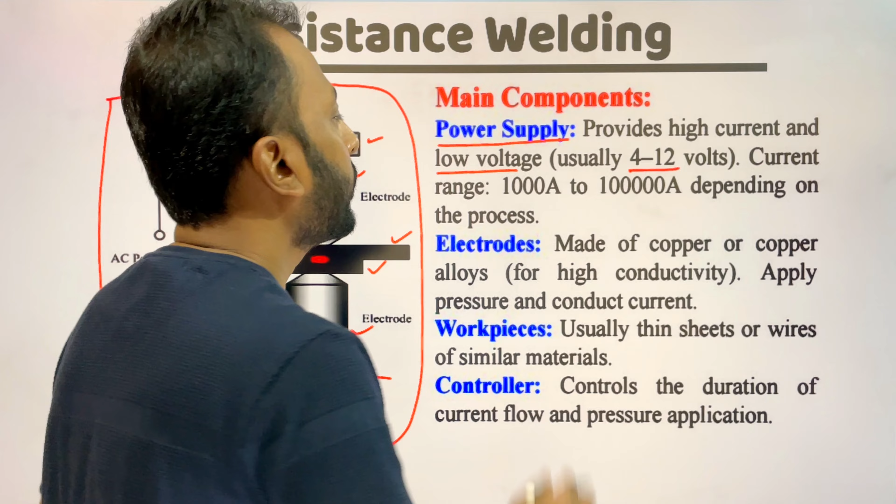So electrode is used here, it is non-consumable. It is used to pass the electricity and to apply pressure both on the parent metals. So here we need power supply. The power supply will be very low in voltage, usually 4 to 12 volts, and a very high range of current, near about 1000 ampere to 1 lakh ampere, depending on the process or depending on the metals we are welding.

So next is electrode. It is made of mainly copper, or copper alloy. Why is it made of copper or copper alloy? Because copper is a superconductor of electricity. So here we are using electricity to create resistance, so we need superconductive materials to flow the electricity. So here we are using copper, the superconductor of electricity. And also the copper electrodes apply pressure both on the parent metals.

Next, the workpieces. Usually it is of thin sheet or wires of similar materials. So here in resistance welding we need to weld similar metals, we can't weld dissimilar metals. Next, the controller controls the duration of current flow and pressure application. It is mainly based on the experience of previous welding. So it is set like a duration, and that duration controls the flow of the current, while pressure is applied manually here.

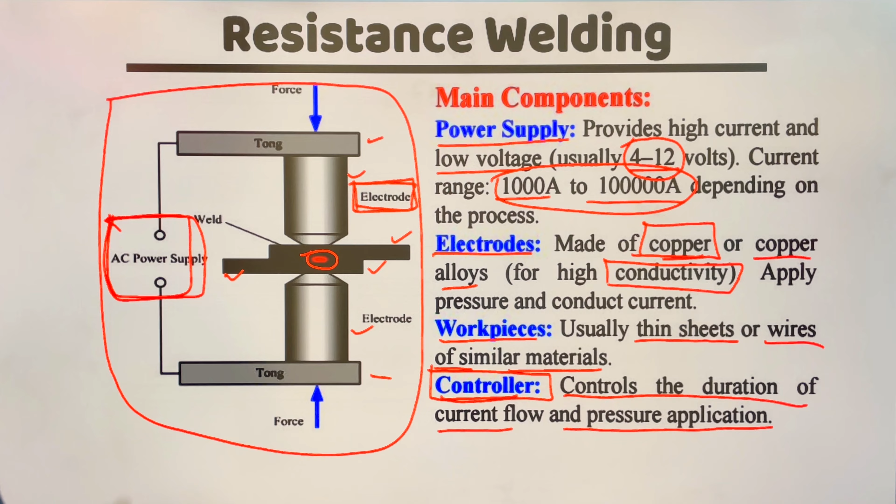So the power supply is connected directly to the electrodes, and we place the materials which will be joined together, similar materials, between the electrodes and provide support to them, and we apply pressure. Here one electrode is fixed, it cannot move up and down, and the other electrode is movable, it can move up and down.

When we need to increase the gap between these two electrodes, we move the upper electrode upwards and place the parent metals. After placing, we apply pressure on the upper electrode to apply pressure on the workpiece, and after the application of pressure we

give AC power supply to the electrodes, and after a short duration the contact area fuses and mixes with each other. After solidification we release the pressure and get the welding joint. Here we can see this is a very small portion that is getting welded - the red portion is getting welded. So in this figure we can see the red portion of the resistance welding.

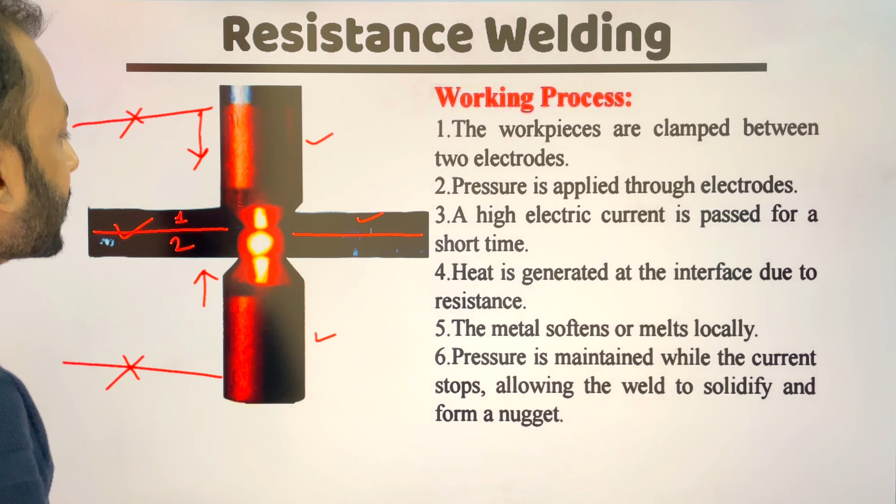When we are applying pressure, we power on the AC power supply, and after a few time we disconnect the AC power supply, but the pressure remains constant. After a few time, when this portion gets solidified, we release the pressure and get the weldment or welding joint.

So why does this happen? This happens because of the electricity. The current is flowing through the electrodes and through the transformer. So this is the complete circuit.

When the electricity is coming through this portion, the density of the electricity or the ampere is much more between these areas - between these areas the ampere is very high. So by the ampere, this portion gets high resistance, and because of the high resistance, heat is generated.

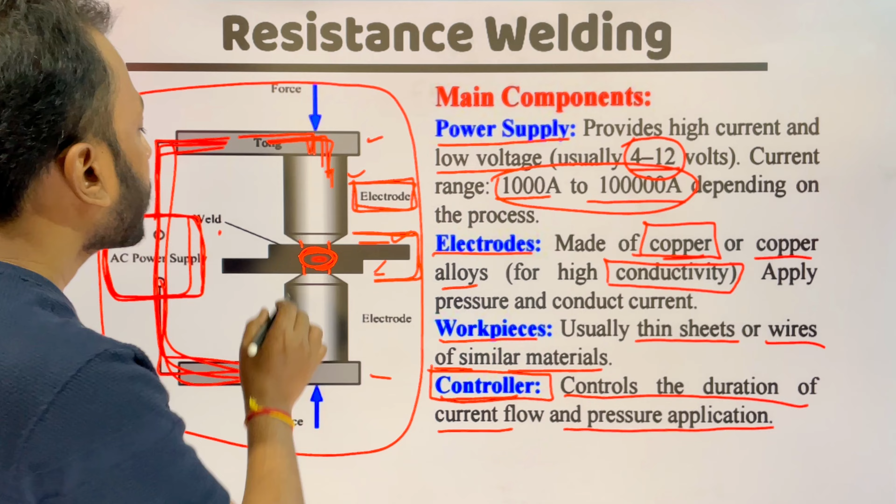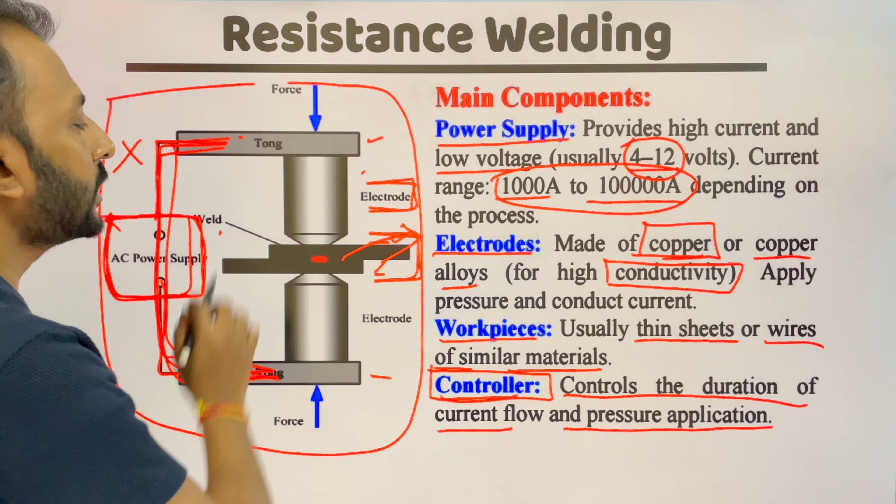By the heat, the metal where we apply more pressure fuses and mixes together. After the AC power supply is disconnected and pressure is kept constant, the portion solidifies, and after the solidification we release the pressure and take out these workpieces to get a welding joint or weldment.

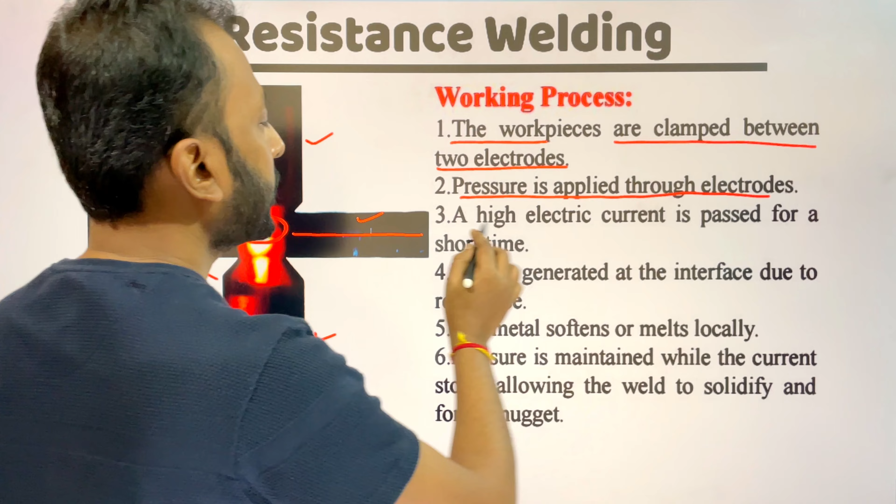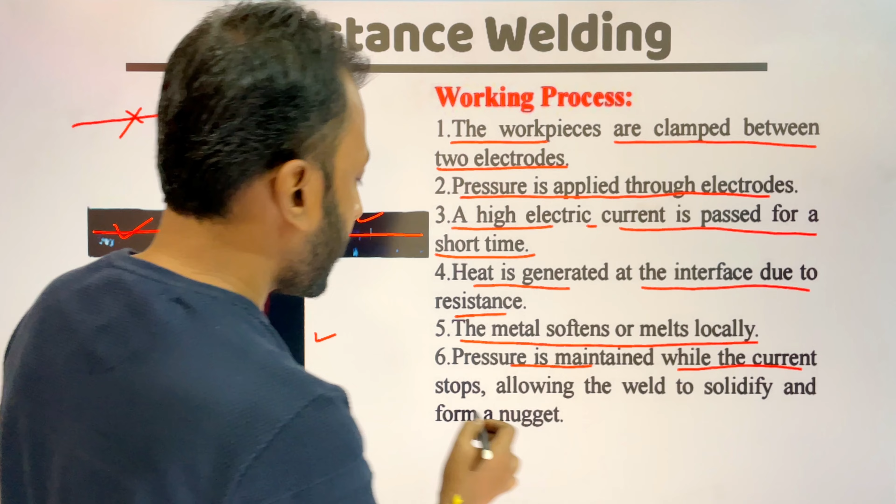So here the workpieces are clamped between the two electrodes. Pressure is applied through the electrodes. A high electric current is passed for a short time. Heat is generated at the interface due to resistance. The metal softens or melts locally. Pressure is maintained while the current stops, allowing the weld to solidify and form a nugget or joint. So this is the working process.

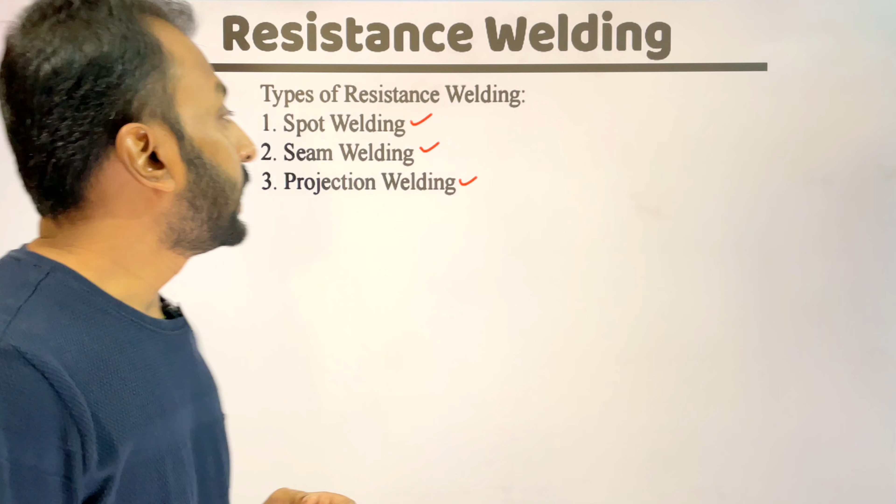So there are few types of resistance welding. The main three types are spot welding, seam welding and projection welding. In the next videos I will discuss these three methods. Resistance welding is not only of these types - there are many types, but the main types are only these three.

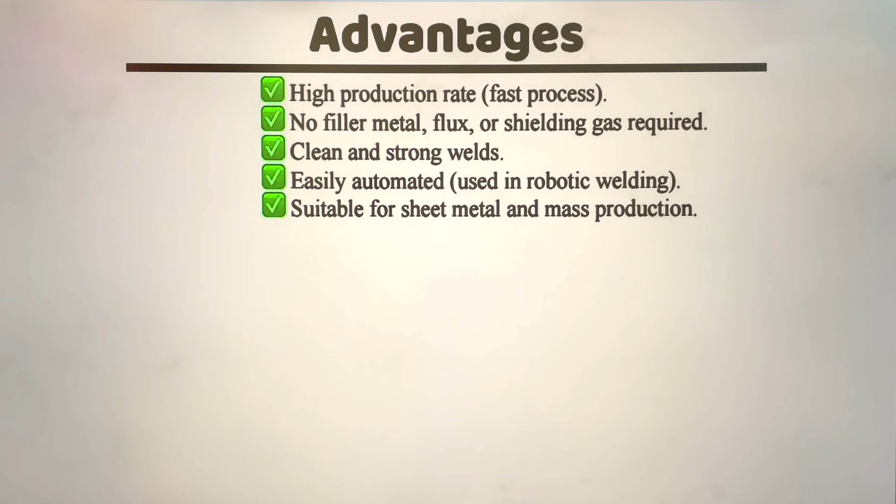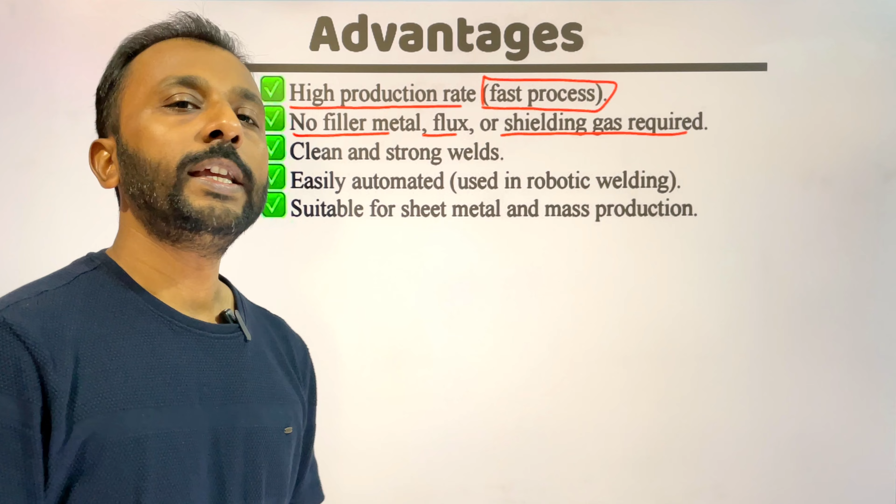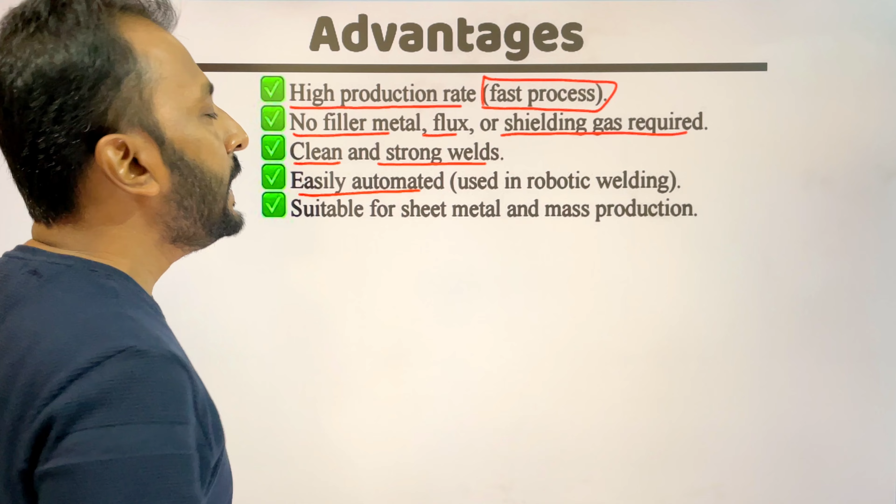So what are the advantages of resistance welding? It has high production rate - the process is very fast. No filler metal, no flux or shielding gas required, so we don't need to clean the welding joint after welding. It gives clean and strong welds, can be easily automated by robotic welding, and is suitable for sheet metal and mass production.

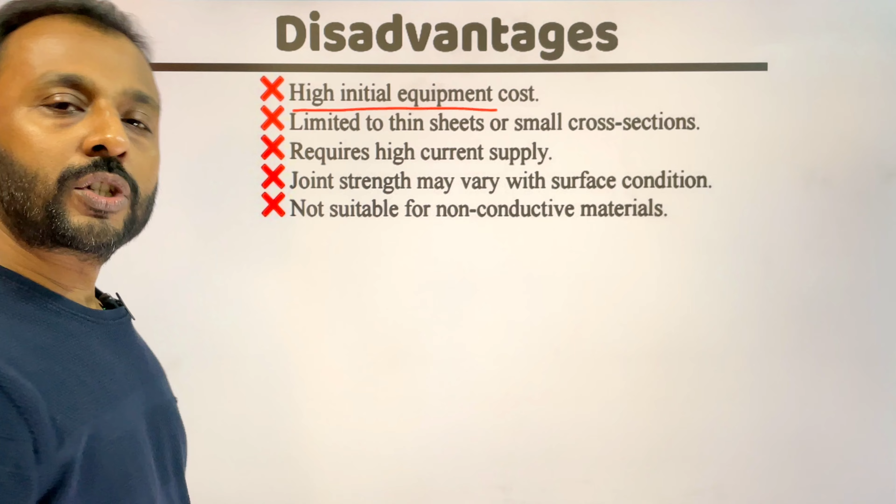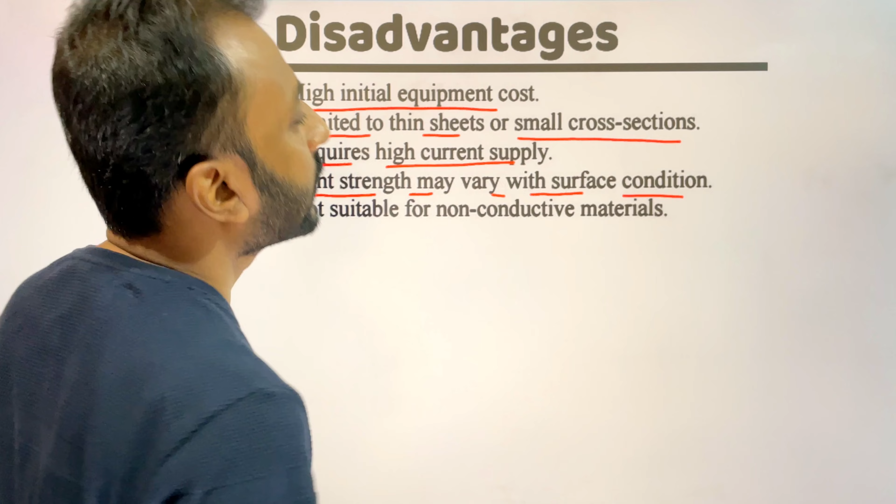Though it has some limitations or disadvantages: high initial equipment cost, limited to thin sheets or small cross sections, requires high current supply, joint strength may vary with surface condition, and also not suitable for non-conductive materials. If we want to join non-conductive materials, it is impossible.

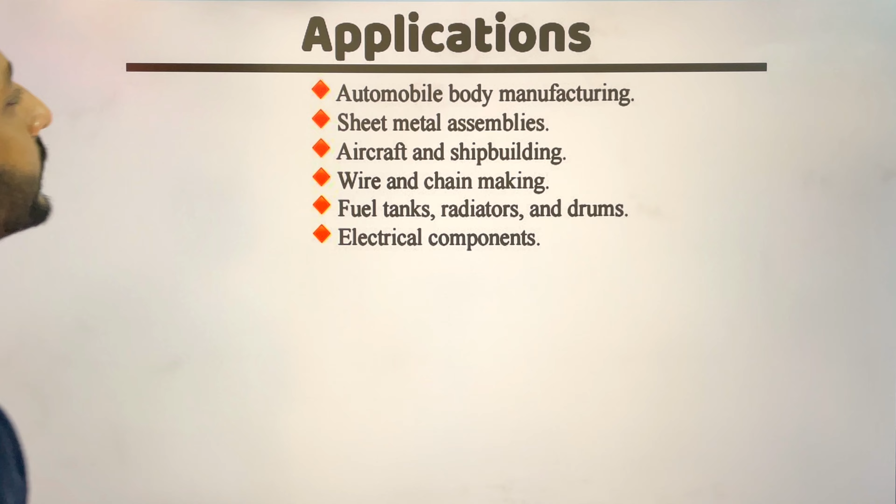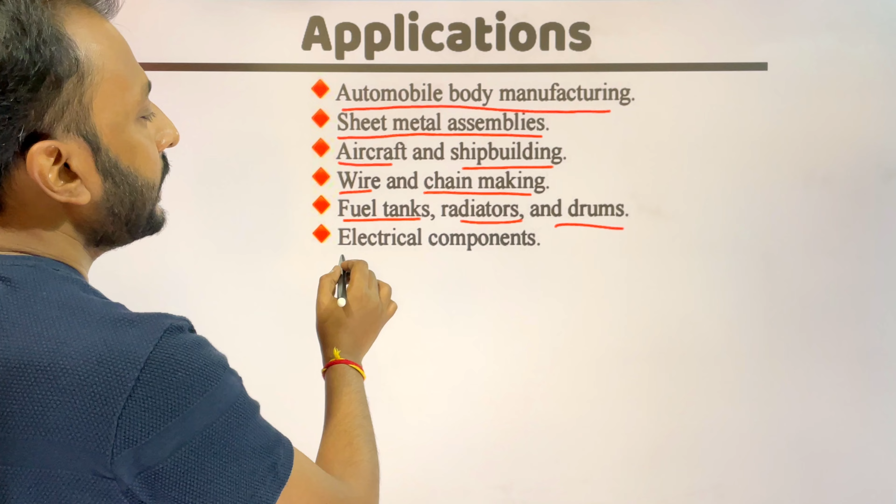What are the applications of resistance welding? Automobile body manufacturing, sheet metal assemblies, aircraft and shipbuilding, wire and chain making, fuel tanks, radiators and drums, and electrical components. So these are the applications of resistance welding.

So in this video, I have discussed about resistance welding. Hope this video was useful for you.